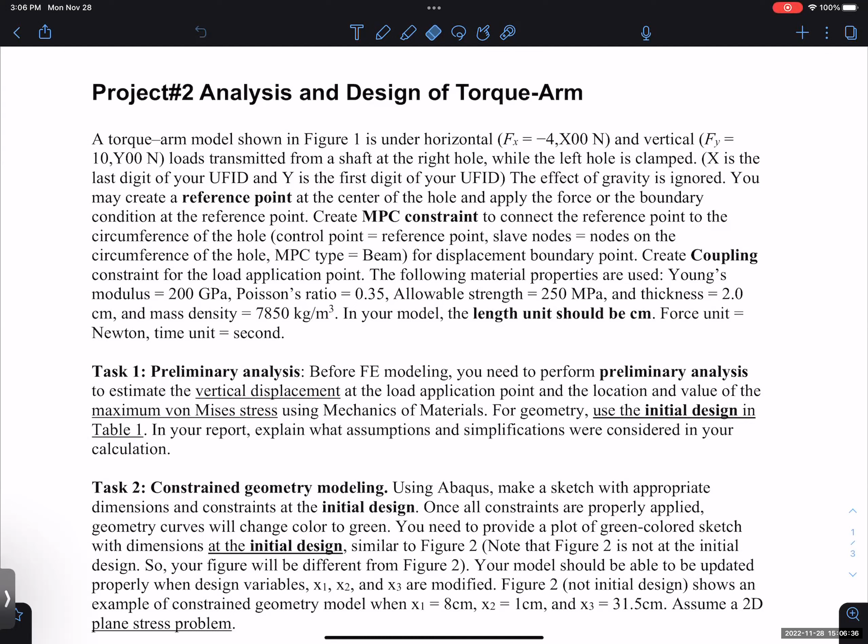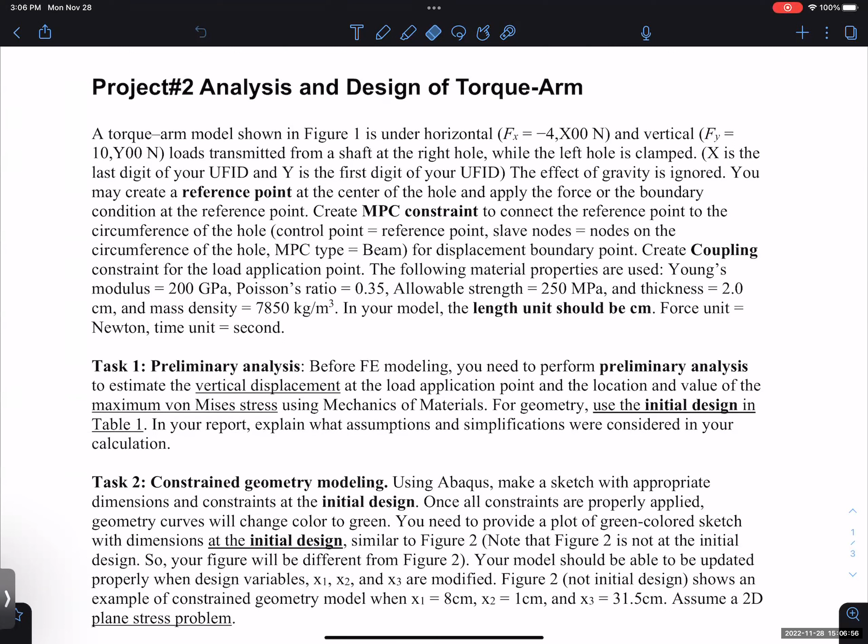For a convergence study, right? For a convergence study, I would suggest just using the global seed for the whole part, because it's really hard to control if you use small elements in some areas. After you graduate and go into industry, you'll probably focus on a small area and not care about the rest, so you use large elements there. That's the most efficient way.

But for our problem, it's a much simpler situation, and to make it easy to compare, I think it's best to just use a global seed for the whole structure. There's no need to find the high stress area and put more seeds there, because in that way, for different numbers of elements, it's really hard to control — like doubling the element size or doubling the number of nodes — and you really don't know which area you want more elements in versus which area should use larger elements. So for our convergence study to have a nice convergence rate, for our relatively simple application, you just use the same size for the whole structure.

Yeah, you still do partitioning. So partitioning is still the same, but when you do the seeding and choose a size, you use the same size for the whole structure. You don't need to figure out that one area has much higher stress and focus there with a much smaller size, because in that way it's not easy to get a good convergence rate.

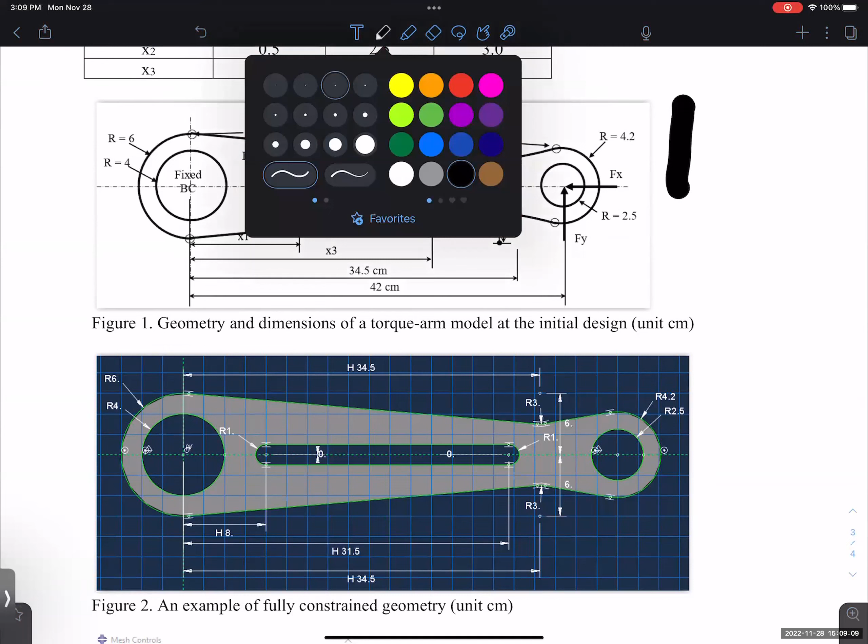We just want to make the region—let's say, in our FEA class, we talked about this. This is always the reference element, S and T. The most accurate result is when our actual element shape gets closer to this reference element, so the mapping is more accurate. The more your element is distorted—let's say if you have an element like this where the angle is more distorted—the more inaccurate result you will have.

So what we want to see is that after partition, your area has 4 edges and all the edges are getting closer to 90 degrees. If not, I think Abaqus constrains it to 15 to 165 degrees. So if the angle is smaller than 15 or greater than 165, you'll see that in Abaqus it will just show a purple area, meaning this area is not properly partitioned, so you need to do it again.

So again, there's no standard solution, but something you can try is, let's say we do something here. Then we can see—or maybe this one is not necessary. So in this area, I think it should be fine, as this is one edge, this is one edge, and these two edges. You can try this in Abaqus. If you partition this one as one region, you should be fine. For this side, I can do something symmetric because the structure is symmetric. And maybe something like this. Now you can see that this area becomes one region, this one region, and this one region. But there's no guarantee this is the best way, so you just keep trying until Abaqus allows you to continue with the mesh.

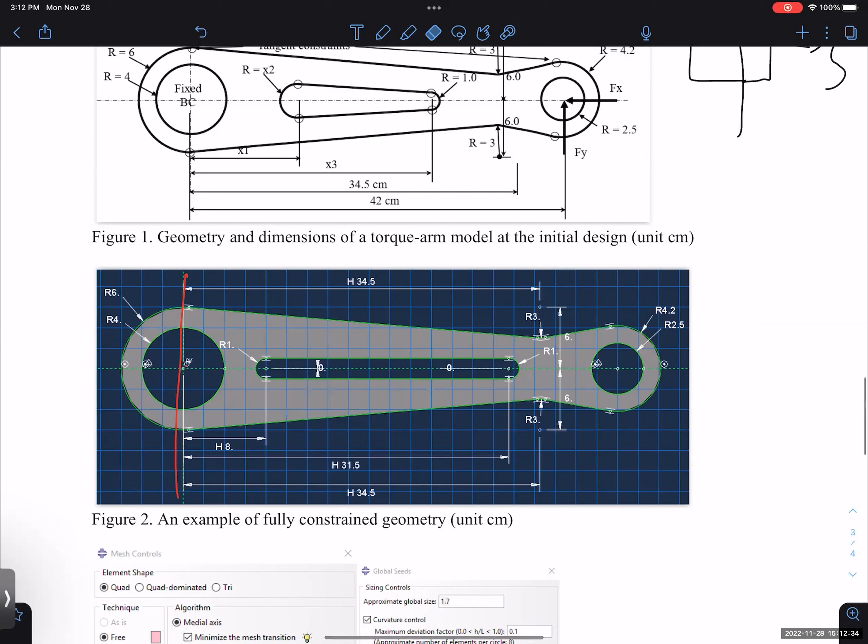So you can try using a free mesh—you don't need to do any partition—and you'll see that the mesh is really a mess. I think in my 5th tutorial, I showed this structure and used free mesh, and the mesh quality was really not good. So I think it's better that you do the partition and get better results. When you do the convergence study, you'll have a better convergence rate and a nice plot. It's not just that I want to torture you guys with the mesh and everything—it's something I want you to learn, because if you know how to do the partition, you know how to control the seed and mesh the structure in the way you want.

For this one, probably it's fine because this structure is simple enough. But when you go to industry, you have a huge structure or much more complicated structure, and you really want control over how you do the mesh. It's not the same element size everywhere—as he said, we may need to focus on small areas. When I see this structure, I know there must be somewhere in this region with higher stress than the rest. So in the higher stress region, I can use a smaller element size, and for the rest of the region, it's fine and safe, so I use a larger element size. This saves computation time, and partition is a way we can control this mesh—in one region we use small element size, the rest we use larger element size. So it's indeed something I want you guys to learn, so try to do the partition first.

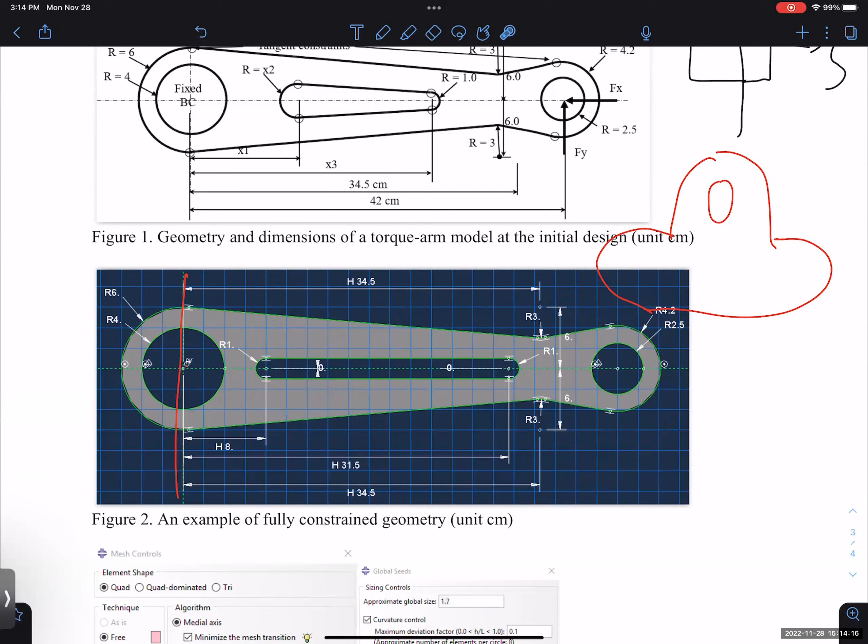In previous years, some students kept trying for several hours and still there were always some purple areas—it doesn't work. I really don't know why, because when I tried it myself, it worked fine. But in case that happens, I really don't want you guys to end up with depression at the end of the semester. There's one way you can handle that.

So this way, it is free mesh. You don't need to do the partition. You use medial axis, so this one can give a relatively better mesh quality than just using free mesh alone. This one is not included in my tutorial video because it's something new in Abaqus in recent years.

My Abaqus tutorial was when I was a second year in my PhD, so that was several years ago. This is something new in Abaqus. It's much easier because if you use this one, you really don't need partition, but still try to do partition first. It's something I really want you guys to learn. If somehow you are really tortured by the partition thing, I'm okay with this one.

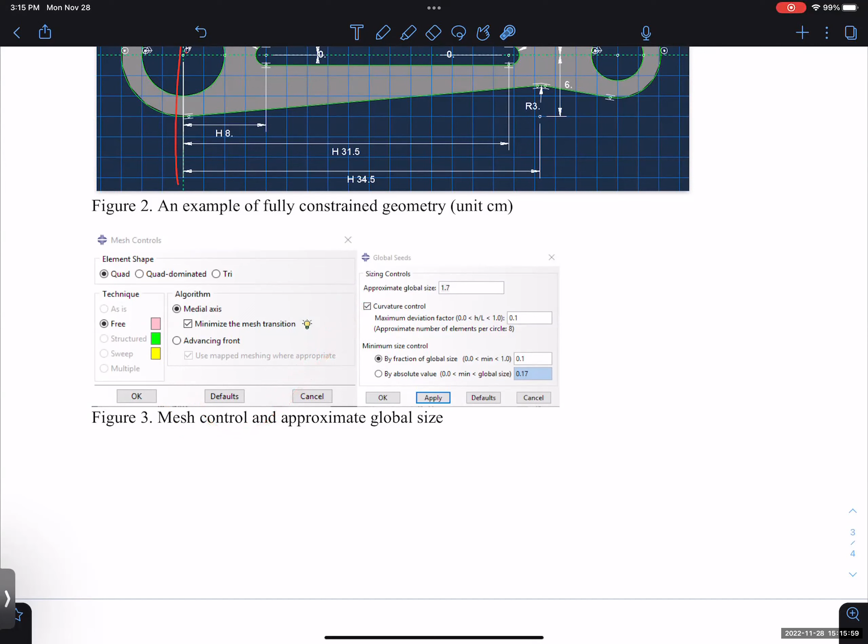So this is what I want to say. I don't want you guys to spend an unlimited amount of time on one project just for my class. I know you guys are crazy busy at this time, so this is just like a backup plan. Any other question?

Have you learned stress concentration in mechanics of materials? Have you learned that a larger radius has less stress concentration effect and a smaller radius has a higher stress concentration effect? Right, so I guess when you try in Abaqus, it shows somewhere here. Is that correct?

Why is that? Based on our understanding of mechanics of materials, we simplify this as a kind of beam. We clamp here, and we have force applied like this, and there's bending. It will bend in this way, and we expect this is the maximum bending moment, and the stress concentration is either at top or at bottom. Of course, because we have compression, the high stress is probably at the top because compression plus compression. This one is tension plus compression.

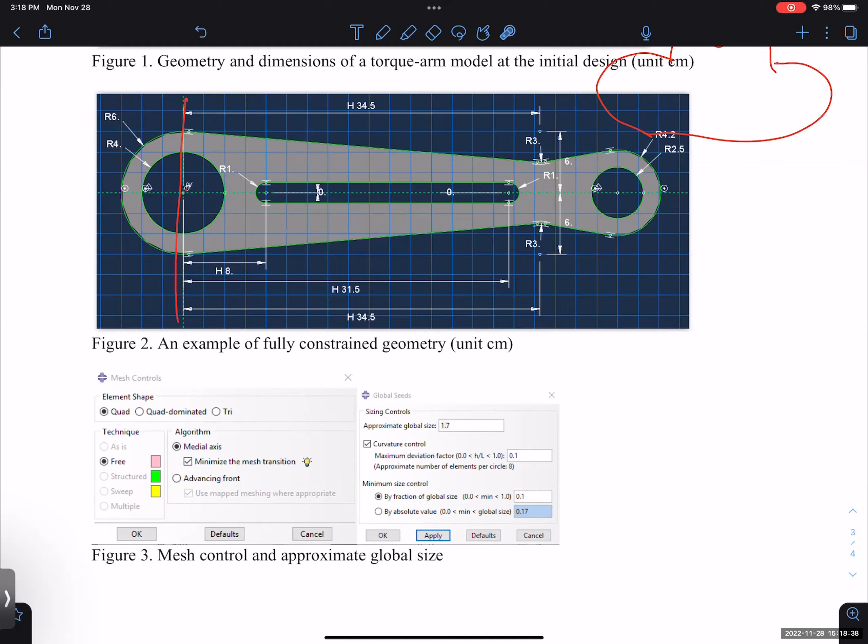Yes. I think the project intentionally requires you guys to know how to use the units. So if you use centimeter as the length unit, the result should be in centimeter. And if you have Newton and everything, it should be Newton, centimeter, everything. So you need to know how to convert.

Make sure this is clear at the very beginning, because I know from my previous semester some students, in the end, got really weird results, and they had the report almost done, and they told me the result is weird. We checked for a long time and figured out they did it wrong. Then they felt like, I don't want to correct that because it takes too much time. You need to correct from the very beginning, so make sure the units are correct at the start so you do not need to redo the whole thing.

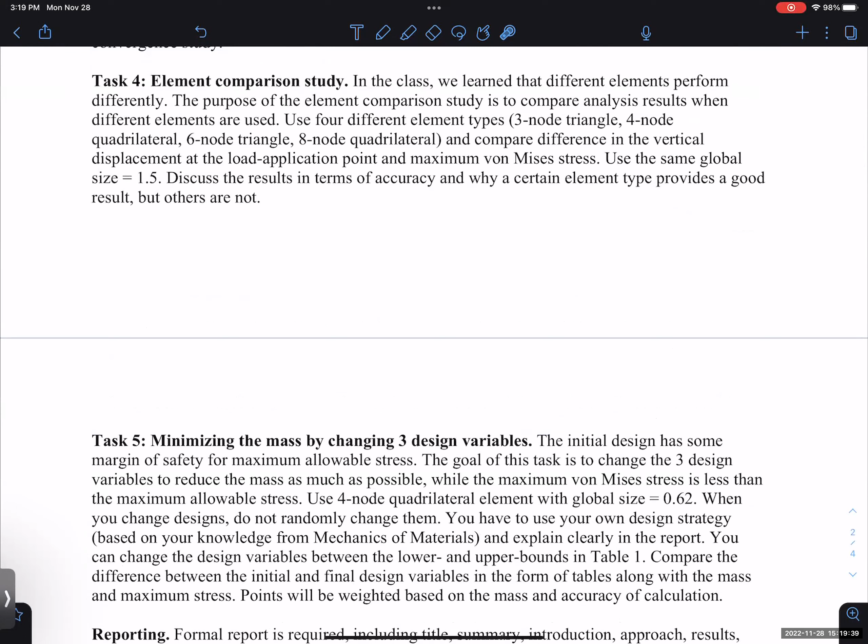So if we use millimeters instead, we convert it—use centimeter, you are required to use centimeter. So if you got results that were correct, but in a different unit, like multiplied by 10 or 100 or something like that, and we stated that, would that be acceptable? We want to test you on unit conversion and being consistent in Abaqus by using centimeter.

So you just use centimeter. There's no other option. It's not about what is the most convenient way for you to do it. It's that we want to know if you know how to convert and make it consistent throughout the whole project. Any other question? Use centimeter.

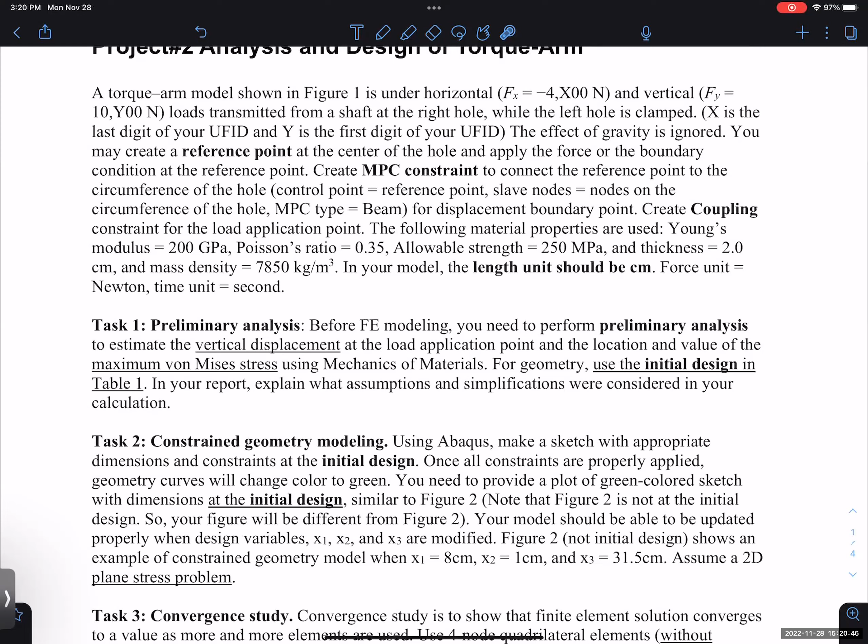Would that be vertically aligned with the load application point, or would it be anywhere on the circumference of the hole? Good question. For the displacement at this node—well, actually, when you do the sketch, there's no point here, right? This is just an empty hole.

Remember that when you do the MPC constraint, you create a reference point. In Abaqus, this allows you to find the displacement at this point. When you check the result in Abaqus, use Tools, Query, and Displacement, then click on this node—it will show the displacement at this node in X, Y, and Z directions. Z direction is 0 because this is plane stress. As long as you've created a reference point here, Abaqus will show the displacement result when you click at this node.

And then for the first half, I guess when we're trying to find the displacement, it would just be along that section, like along the vertical line part, like the next 42 centimeters.

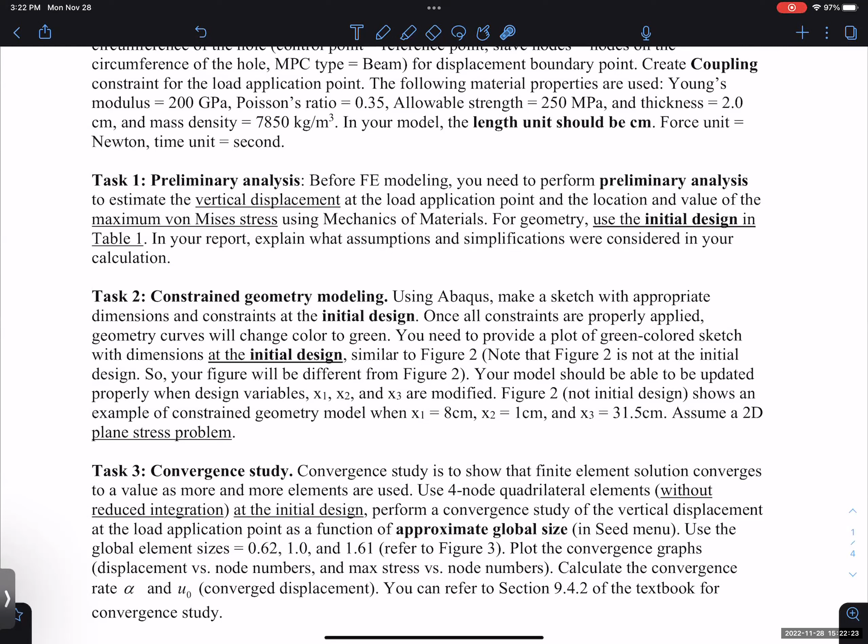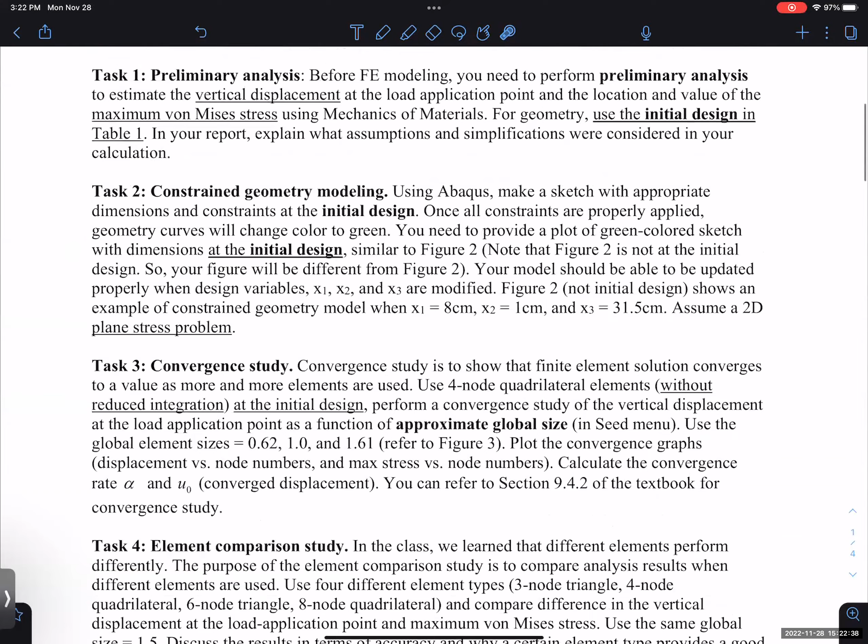Let's see, I think there's some question also. Let's talk about the preliminary analysis, because I think some students are very confused about this, so I can spend more time talking about it in detail, and then you can ask me your question. Is that okay?

For the preliminary analysis, we want to use mechanics of materials to calculate what is the bending stress and what is the displacement. Based on the questions asked before the holiday and during office hours, I think some students are confused, like the preliminary analysis should give the accurate result, and how to simplify the model to have an accurate result.

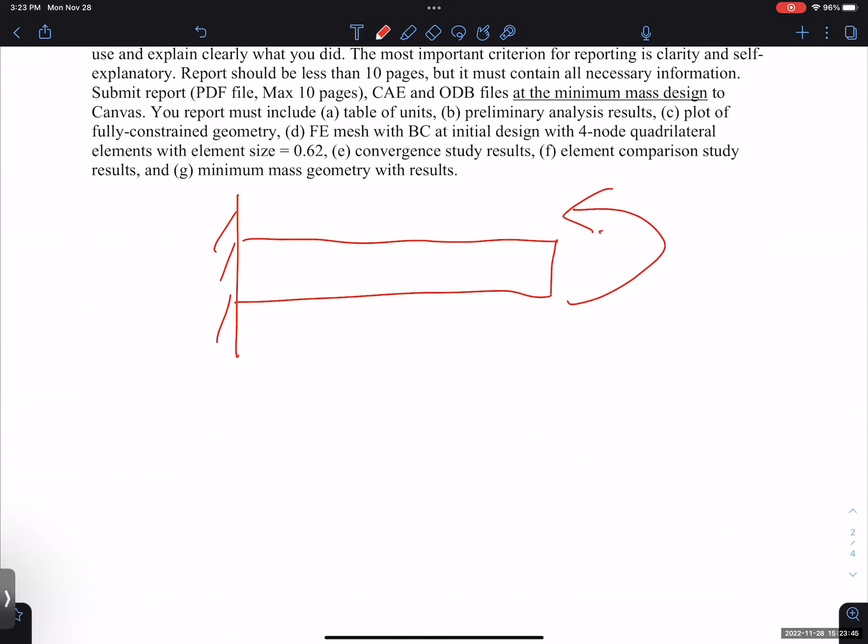This confusion might be because of my tutorial 4 video, which I watched this morning. In that video we did a preliminary analysis, but we used a different model. For that problem, yes, we have an accurate result—we used mechanics of materials for this pure bending problem. We can find the exact maximum stress and exact displacement at the tip using mechanics of materials, because that problem is simple enough.

But for our problem, for this structure, there's no accurate result that you can calculate from mechanics of materials. So different students can have their own understanding and their own way to do the preliminary analysis, and all of them just give us an approximation.

It really doesn't matter who is more accurate, because in the end we just want to make sure that the result from Abaqus is not weird. In previous semesters, some students did something wrong—like boundary conditions, loading conditions, mesh, or anything defined incorrectly—and got results off by several orders of magnitude. So our preliminary analysis just wants to make sure the hand calculation result and the Abaqus result are in the same order of magnitude, to confirm there's no weird mistake in the Abaqus simulation.

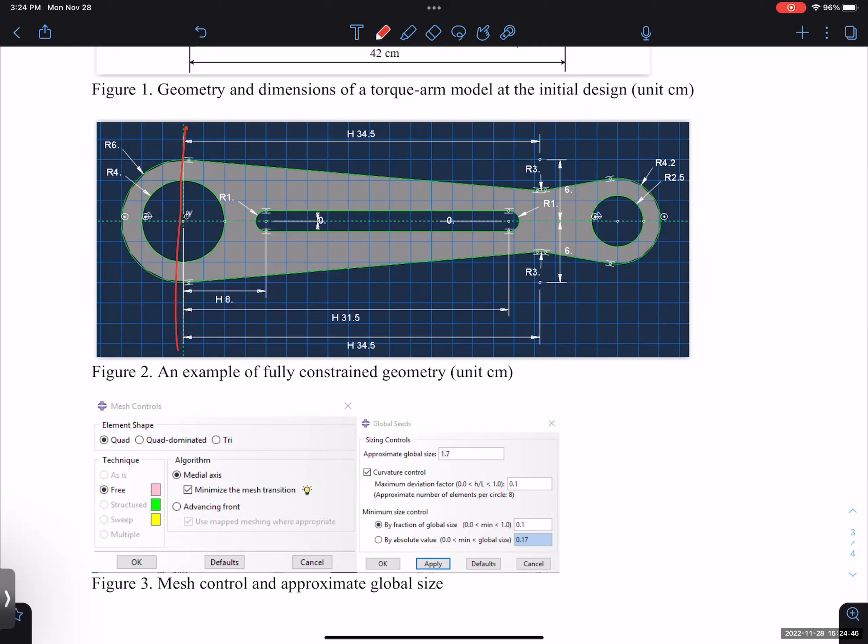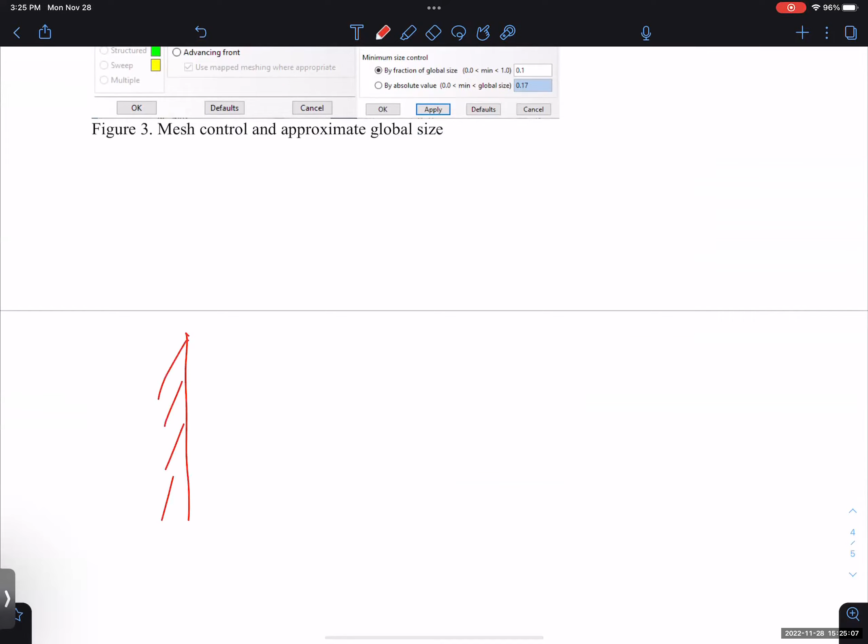So to simplify this model and use mechanics of materials—we never learned how to calculate a beam with a cutout in the middle, right? We didn't. So the only thing we could do is: on the left side, since the boundary condition is fixed here, we can consider it clamped.

And the length of the beam—since we are applying the force here, we can consider this as the length of the beam. So that part is easy. The part where you need to make a decision is the height of the beam. The thickness is simple, it's the same as our actual thickness. But how do we define the height of the beam?

I would say that, okay, let's consider this as the middle point—it doesn't need to be the exact middle point. As you can see, if there's no cutout in the middle, I think this is a reasonable approximation, assuming this is the middle point of this line.

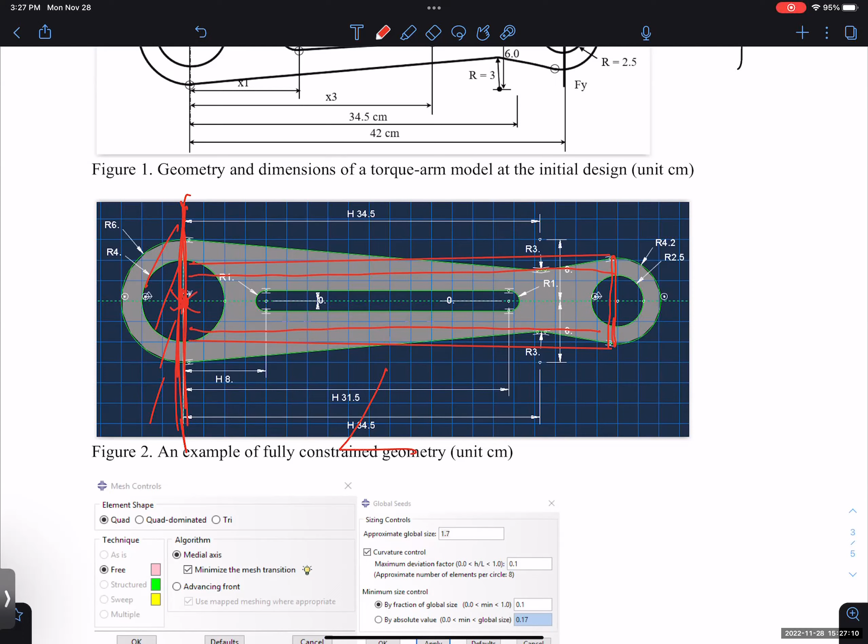Because of this cutout, it actually makes our beam less rigid, so we can consider maybe a little bit smaller height. But how much smaller? You just make a decision yourself—there's really no standard way. So I'd say if we consider without the cutout, the middle point height is H1, and with the cutout—let's make this clear—let's say that this is H1.

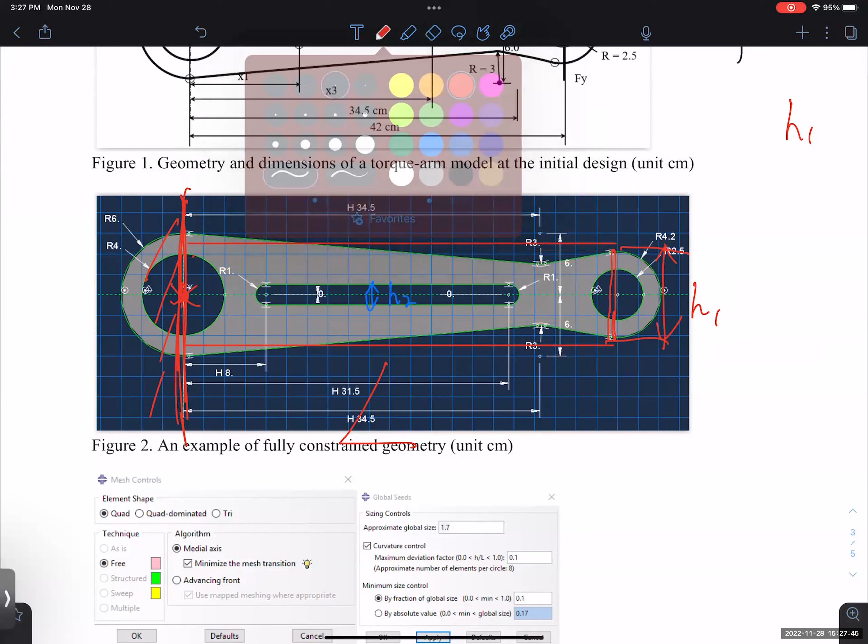And this is the cutout is H2. So H1 minus H2 should be somewhere in between, right? And for which value you want to choose, you can just choose. Just make sure that it is a reasonable value, and there's really nothing like a standard solution for this one. Anybody can get an accurate result by this hand calculation, and we cannot say that hand calculation is more accurate than Abaqus or Abaqus is more accurate, because both Abaqus and hand calculation are approximation.

So if you want to get a better result, you do convergence study, and you will see how it converges gradually to the accurate results.

And for this preliminary analysis, again, we have the length, we have the height, and we have the thickness, right? We can do the calculation.

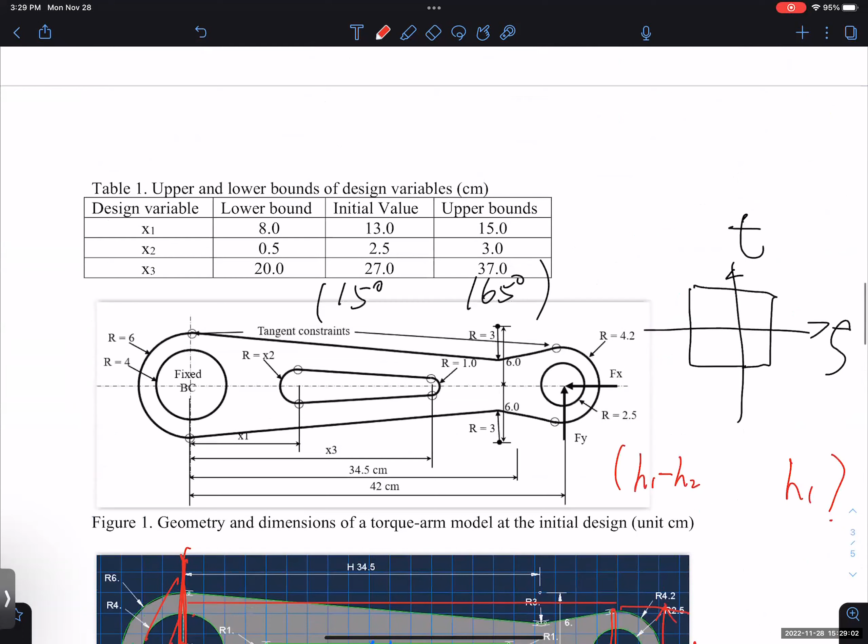Be careful, the question asks about the von Mises stress. Calculate maximum von Mises stress. So let's say if we just simplify it as a beam. Let's say we already have all the dimensions, and we have force.

Where is the location to have maximum von Mises stress? Where? For this kind of beam, it should be here, right? Why is this place? Yes, yes. So let's say, thank you.

So for purely this force, it will generate a bending, and the bending will bend in this way. So we know that it has maximum tensile stress here and maximum compressive stress here, right? This is for the vertical force.

And for this horizontal force, well, compressive stress is constant through the whole cross section. So we know that the maximum bending moment is definitely at the boundary condition, but at the bottom surface it is tensile from the bending and compressive from this horizontal force, right? On the top surface, we have compressive from bending and compressive from this one, so compressive plus compressive is higher. But this only explains the sigma xx, right?

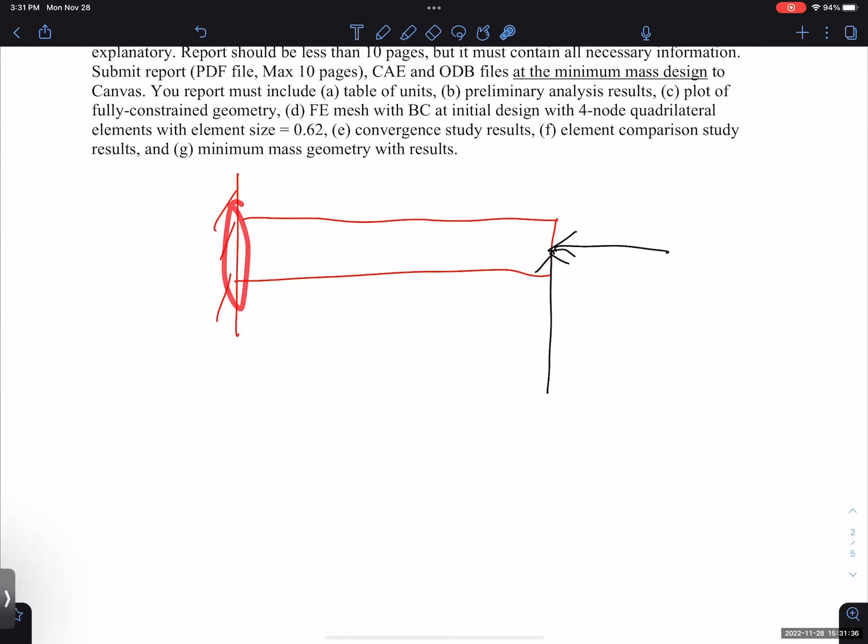So we know, again from mechanics of materials, that for this force, it's not just bending, right? It also has transverse shear. This transverse shear will generate shear stress here, over the whole beam. But we know that this is a critical location, so there is shear stress generated by this vertical force. But does it change our conclusion if my question is not maximum normal stress, but maximum von Mises stress?

No? Why? Transverse shear stress. Ready? Anybody has other opinion? Raise your hand if you think that shear stress is constant across the cross section. Raise your hand if you think it changed and how it changed. Anybody answer me? How does shear stress change? Yes. How does it increase? Linear increase or quadratic increase or cubic?

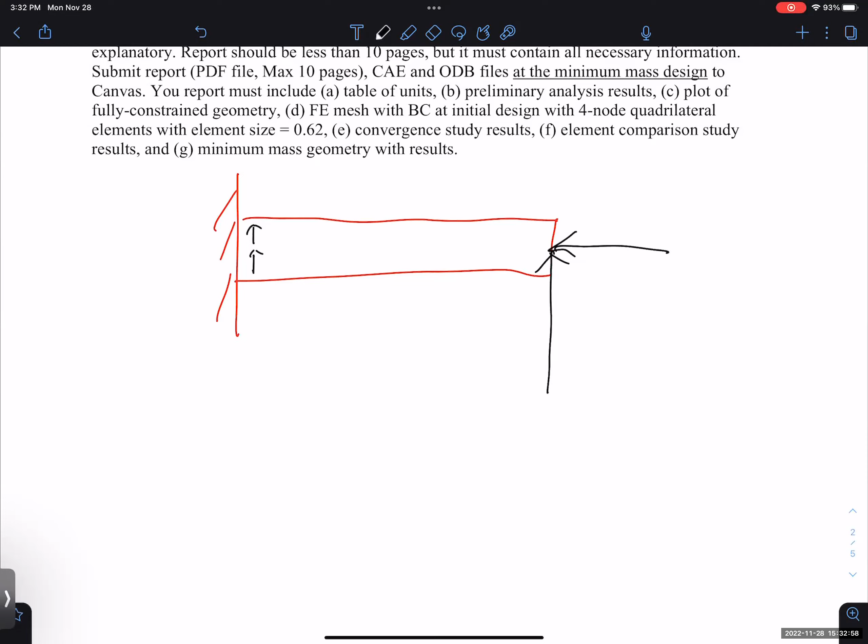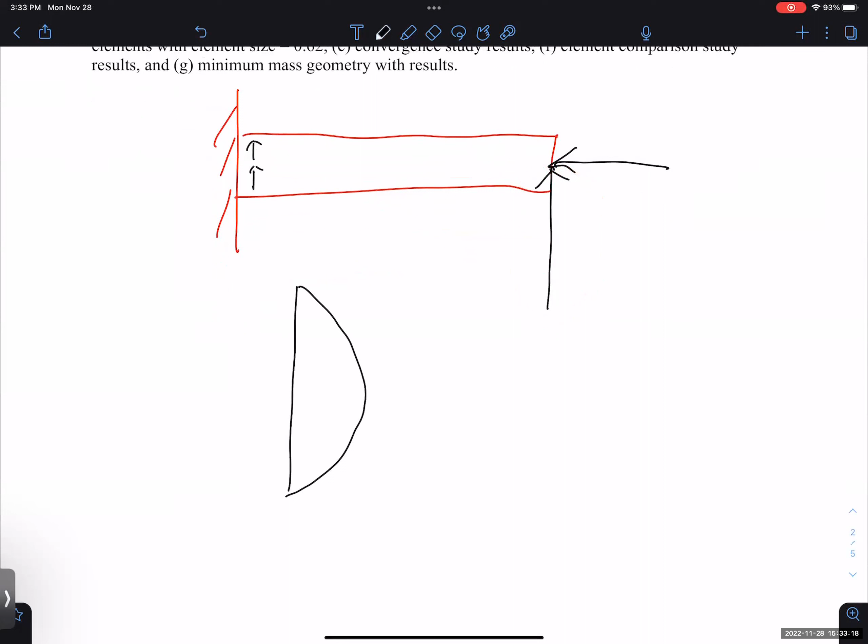Thank you, yes, it's quadratic change. So back to mechanics of materials: if you have a transverse force here, it will generate shear stress. At the cross section, the magnitude of shear stress changes quadratically. It is zero at top and bottom, and maximum at the neutral surface. Since it's a quadratic change, I can represent it in terms of magnitude like this, and for direction, of course, upward.

So this vertical force will generate shear stress, but at this location it really doesn't matter, right? Because at this top point, shear stress is 0. So if shear stress is 0, von Mises stress is equal to sigma xx. Am I right?

Again, this will require you guys to have a solid understanding of mechanics of materials, and I think this is very important. The question did indeed ask you about the von Mises stress, but because we already identified this as the critical location, some people may say, okay, what if the shear stress is larger than sigma xx?

If you've done a lot of calculation in mechanics of materials, we know that for the same force, when it generates normal stress by bending and shear stress caused by the transverse shear force, the normal stress caused by bending always dominates, right? It's much larger than the shear stress caused by transverse shear. So we know that the shear stress, no matter what, even at the neutral surface, should be much smaller than the normal stress in magnitude. So there's no problem — this is the critical location, and since shear stress is 0 here, von Mises stress is equal to sigma xx.

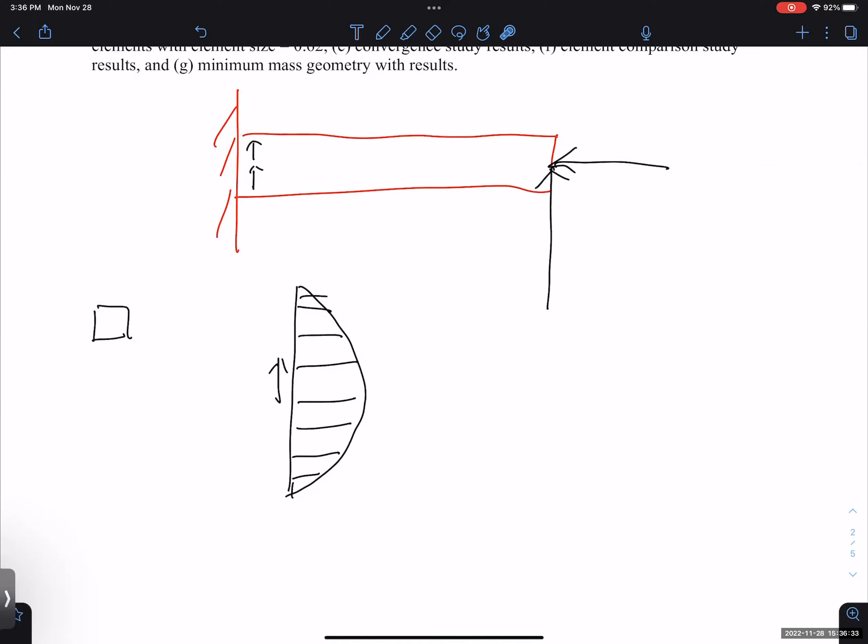Did the problem statement say how many iterations? Change design to reduce the mass as much as possible while maximum von Mises stress is less than a given limit. It doesn't specifically say how many iterations. I would say same as project 1, 4 or 5 iterations. I definitely don't want you guys to spend an unlimited amount of time doing the iteration by hand calculation.

We need to make sure that maximum von Mises stress is below the maximum normal stress, that's for sure. But for reducing the mass as much as possible, just do 4 or 5 iterations and it should be fine. Any other question?

ODB file is output database. You go back to the file, the same folder where you check the input file, RPT file, and everything. You should have something like something.odb — just submit that one. Any other question?

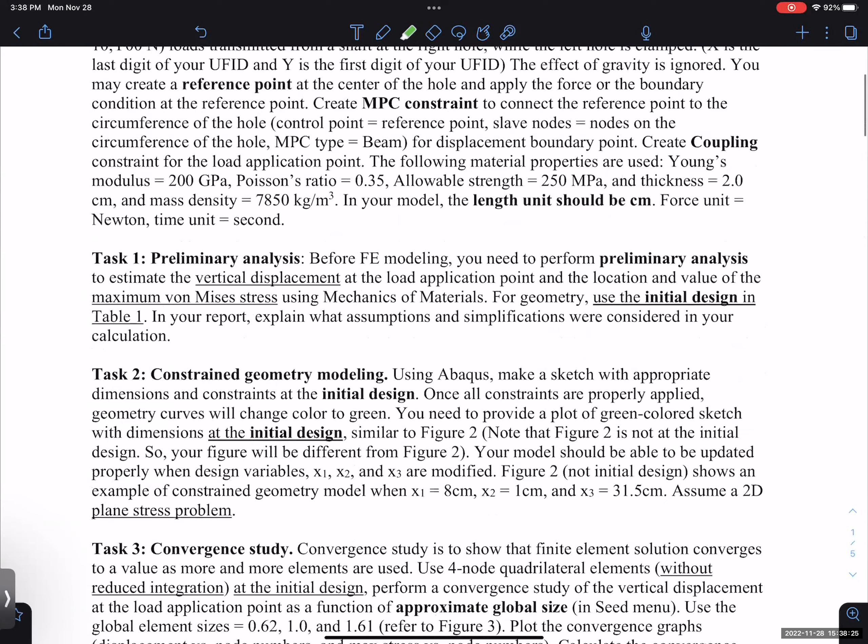I also want to talk about the constraint geometry. I'm not sure if you guys tried this or not. In my tutorial, I didn't make it a constraint because in that example I did in class, there's no change of design, so it's not necessary to do the fully constraint. You just put it there, and the lines are yellow, not green. Green means fully constrained, and yellow means it's not constrained. So basically what you need to do is figure out how to make this line become green and fully constrained.

Let's say you make this center of the circle a fixed point, at 0,0 or any fixed point. Then you define the radius of the circle, and this circle will turn green. If you don't define this center point or the radius, either one, and just draw a circle, the circle stays yellow. Has anybody tried this on Abaqus? Have you guys successfully made it green?

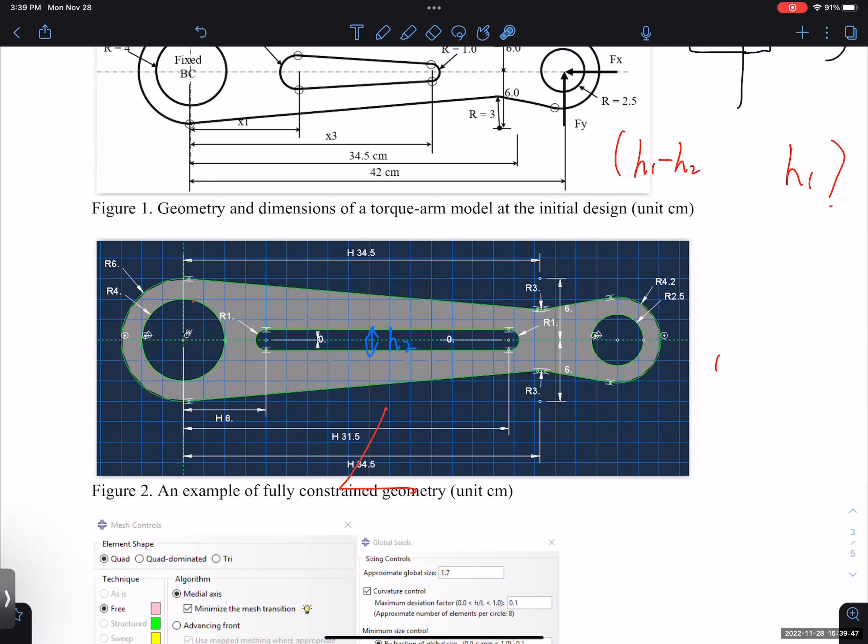Also, what I did here is make a construction line — this is one horizontal construction line, and this is a vertical construction line. You can define the coordinate of this point and make it a fixed point, which is also the same point as the center of the circle. Once this center point is fixed and the radius is fixed, this circle becomes fully constrained and will turn green. Same thing here.

For this one, you can make the center of the circle — of course there's a relative distance. If you define that the center of the circle is on this horizontal line, and you define this distance, it means the center of the circle is fixed. Then you define the radius, and this circle will turn green. Same thing, there's a tangent relation here — in the sketch constraints, you can just put the tangent there.

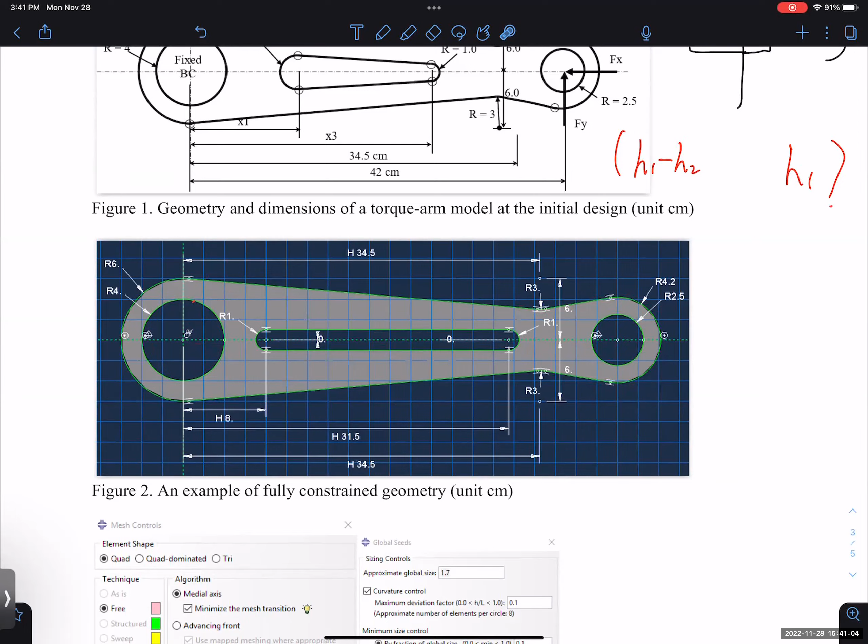In this way, when we change the design, the parameters we need to change are x1, x2, x3. When we change the design, let's say you define this circle — it's a half circle, but when you do the sketch it should be a whole circle with a center of the circle here. x1, what is x1? Wait a second — x1, x2, okay, here.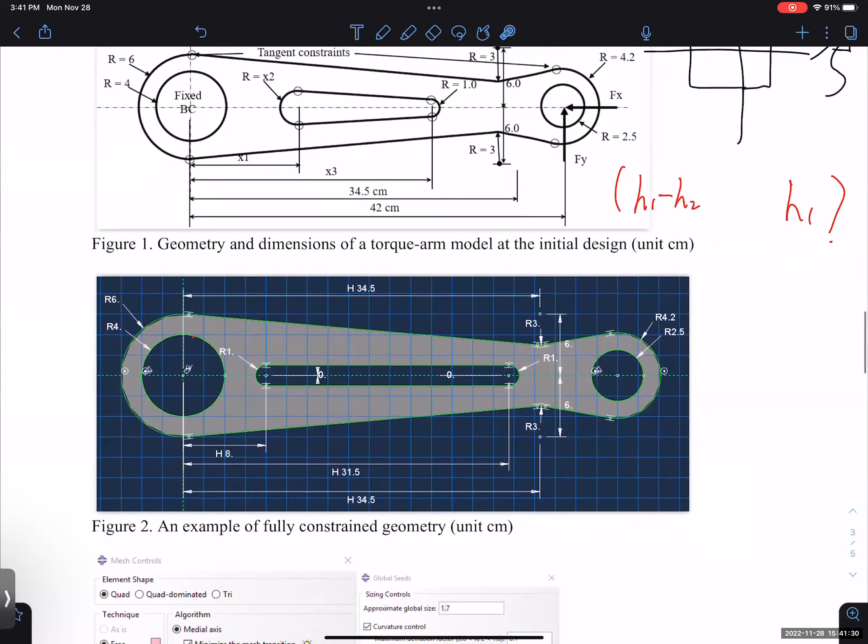This will make sure that the center of the circle moves only on this horizontal construction line, and changing x1 will only move this center point left and right. It will not move this other point because that point is already fixed. So this lets you change the design the way you want. Also, x2 is this radius — when you fix the center of the circle on this horizontal construction line, the center won't move up and down, so when you change the radius, that's x2. And the same thing, x3 is this distance.

So this is how to make your geometry fully constrained, make all the lines green. You may need to try several times. Let's say when you do the sketch, you need to draw a full circle first, and then use a tangent relation between the straight line and the circle.

And then you need to trim part of the circle. After you trim, you can see that part becomes yellow again, because when you trim half the circle, it loses the definition of the radial circle. So you need to redefine the radius and it will turn green.

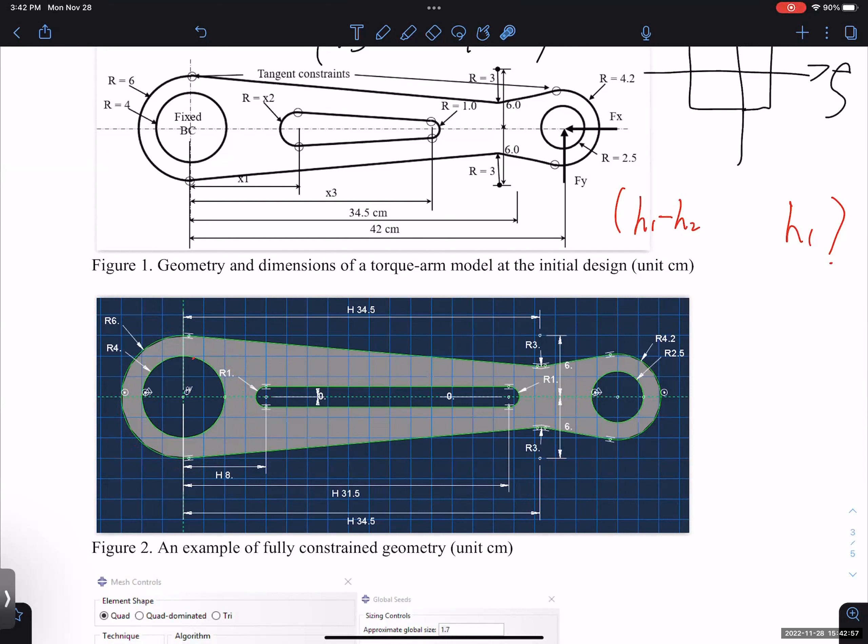So you need to just keep trying until everything turns green. Once you make it fully constrained, when you change the design, it will change the way you want. Otherwise, the center circle will just jump everywhere. Let me check anything else.

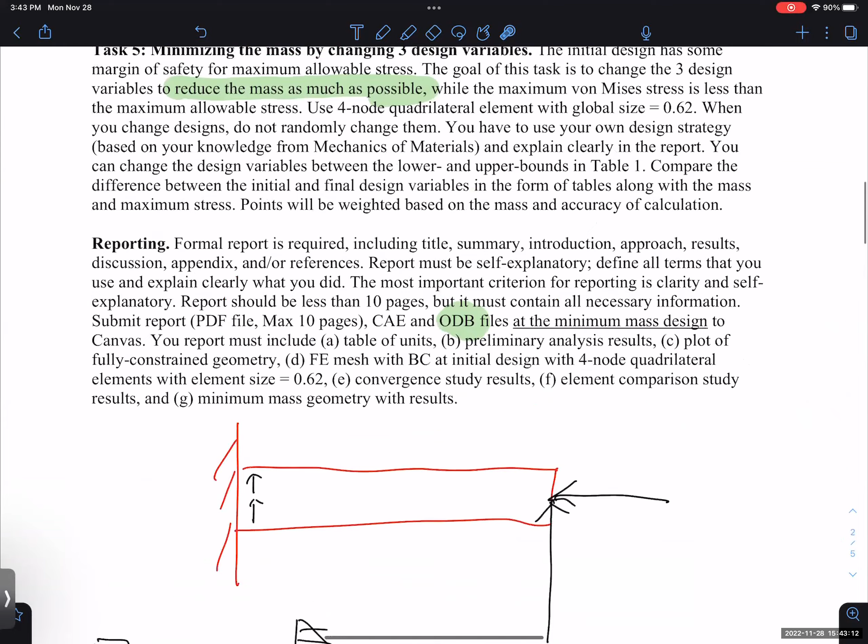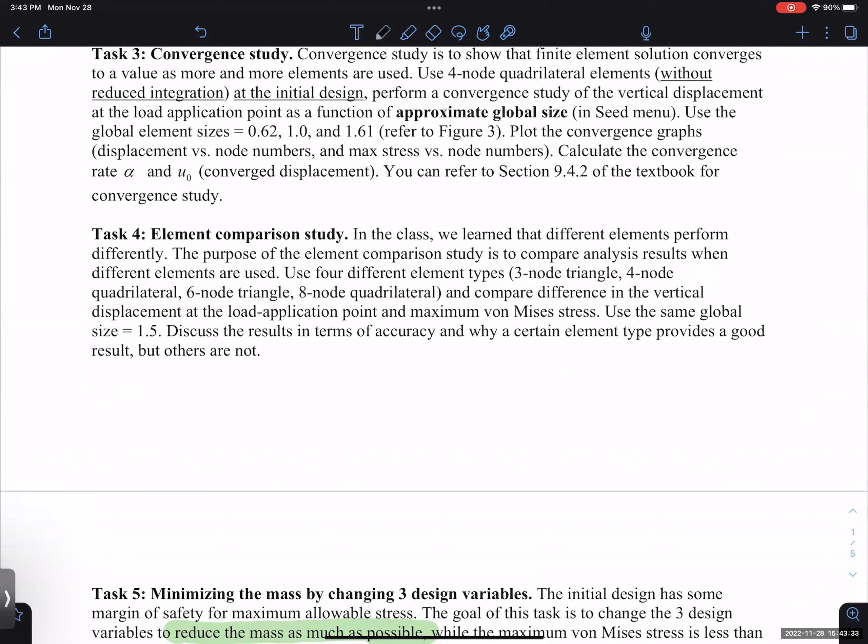And for this, 3-node triangle, 4-node quadrilateral, 6-node triangle, 8-node quadrilateral - this is controlled by when you do the mesh. In the mesh, they allow you to choose, I think it's element control, you can choose the linear element and quadratic element.

Also in the element type, you can choose triangular element and rectangular element, or quadrilateral element. So in the element control, you can choose linear or quadratic element, and in element type, you can choose triangle or quadrilateral element.

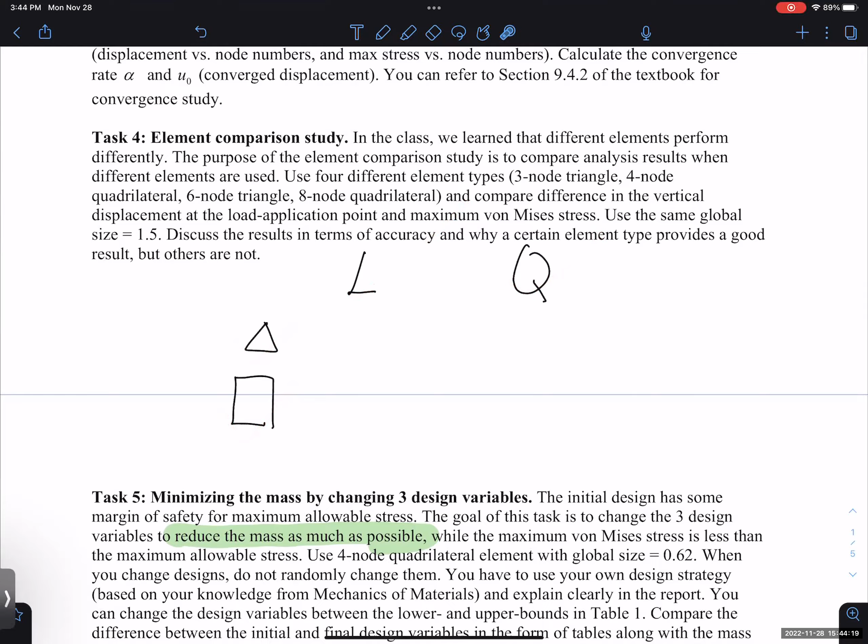There's also an option called quad dominant, don't use this one. This is for complicated geometry - they use majority quadrilateral elements, and for the rest, small parts use triangle elements. But when we really want to do comparison or convergence study, it's better to use either quad or tri - tri means triangle, quad means quadrilateral.

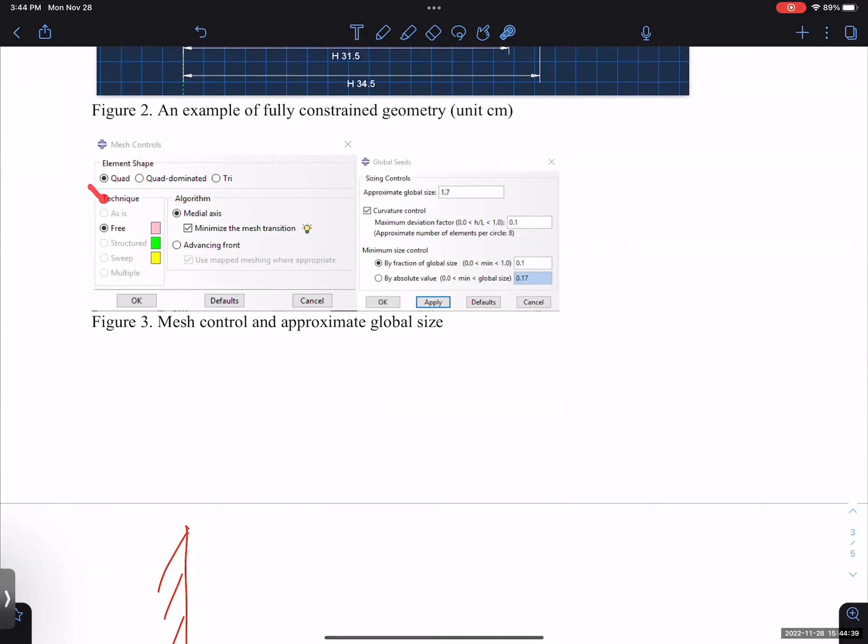So if you can control the order of the element type and the shape of the element, you can see that if it's linear and triangle element, it should become the 3-node triangle, which is CST. If it's quadratic, then this is LST.

And if it's rectangular, this should be Q4, and this should be Q8. So this is how you change the different elements by controlling the mesh.

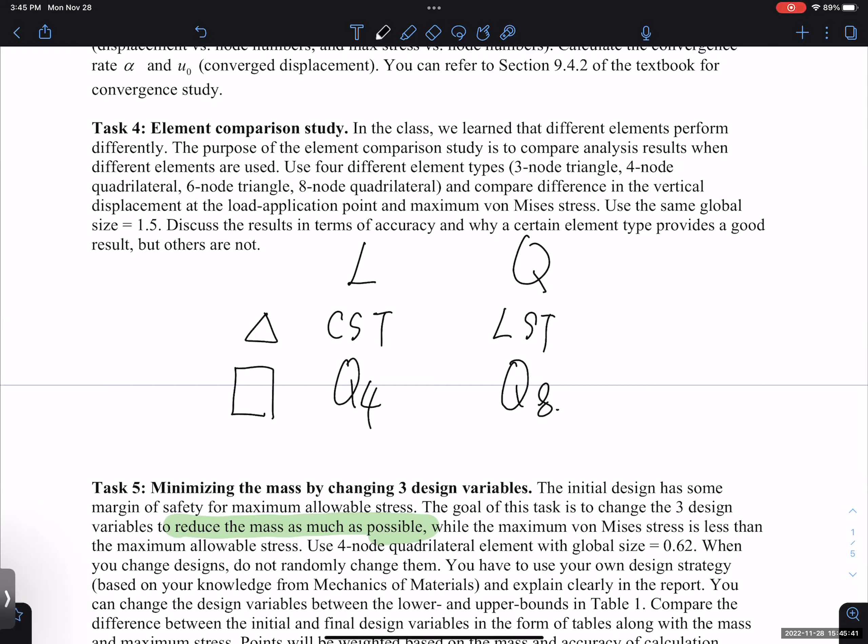Any other question? Let me see if there's any.

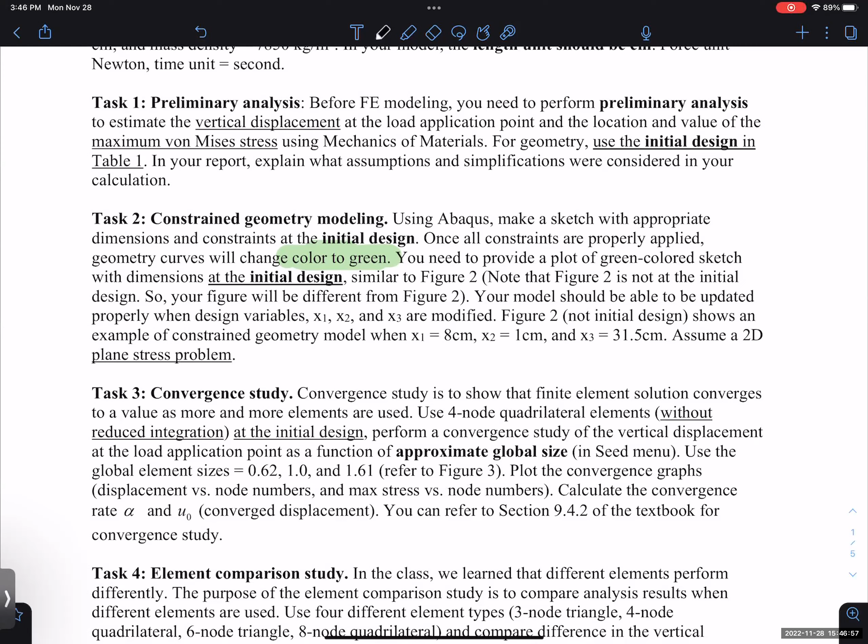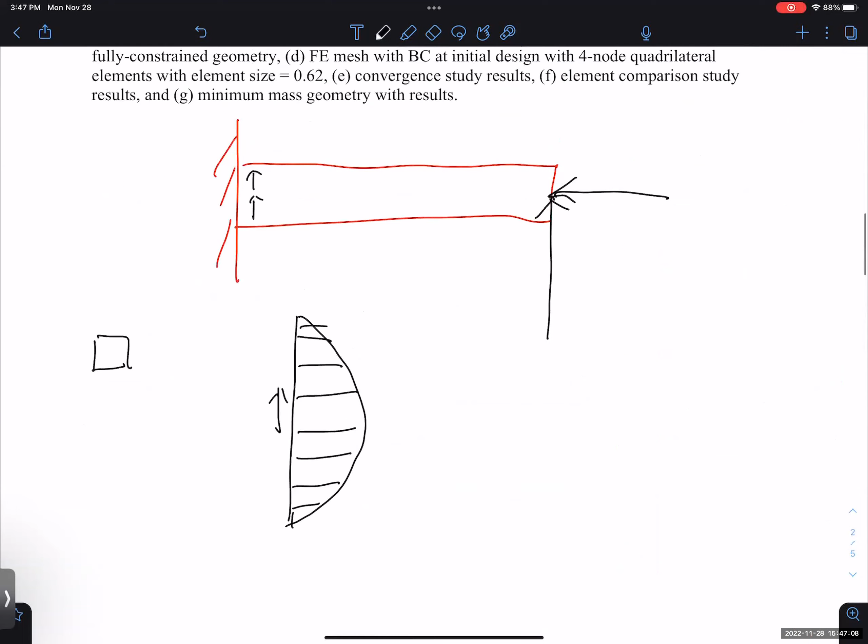Thank you. Thank you. Still having our exam 3 on Friday? Yes, Wednesday will be the exam review. Thank you. You're welcome.

Good question, I need to ask TA. There's class Wednesday, right? Yes. Okay, exam review. Oh yeah, I had a question - is exam 3 still on Friday?

Yes. Okay, do you know when our first project is? One student just asked me that question. Okay, I need to ask TA.

Hours during exam week? Yeah, it's like the 7th to the 12th, I think, something, whatever. Yeah, the project's gonna be due. Okay, I will have office hours before until the project. Okay, so but start early, don't wait until the last minute, it's the exam.

Okay, full attention, okay sure. Is the exam still Friday? Yes, Friday. So do we have class? Exam review, and then, but we don't have class. No, no. Oh but we have class next week, like the Monday and Wednesday. No, what do you want, to have class after exam? Okay, so after the exam? No, there's no class after exam.

This is the elastic modulus, we would have to change the units of that, right? I kind of realized I did it in newtons per meter squared, and my deflections were very small, so I'm kind of realizing, do you think that could be it? How much have you done on your project? A lot, a lot. I can go through and read it.

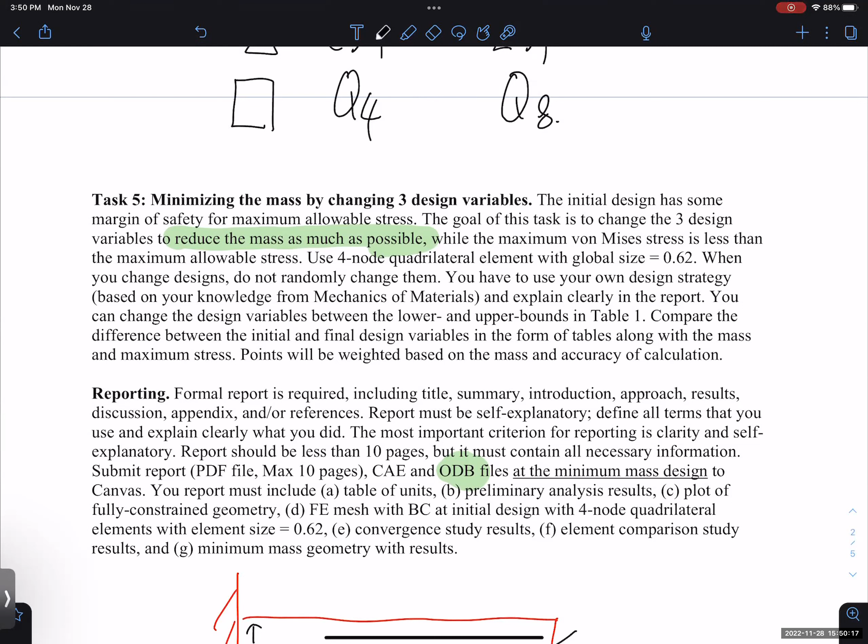Homework 10, right? Yep, homework 10. This one? So a mesh with 64 and a mesh of 16, similar to the example in class.

That example we assumed constant A, constant area. This one we assume constant volume, because the volume is the same regardless of mesh. We assume constant volume V divided by... it says the whole structure's volume is V. And if it's 1600, oh, you take the cube root. Okay, that makes more sense.

So you use constant volume because it's 3D instead of 2D, right? Correct. Because no matter how we mesh the structure, the volume is the same for the 3D situation, and for 2D the whole area is the same. So we assume this is V and total number of elements, and this gives the edge length.